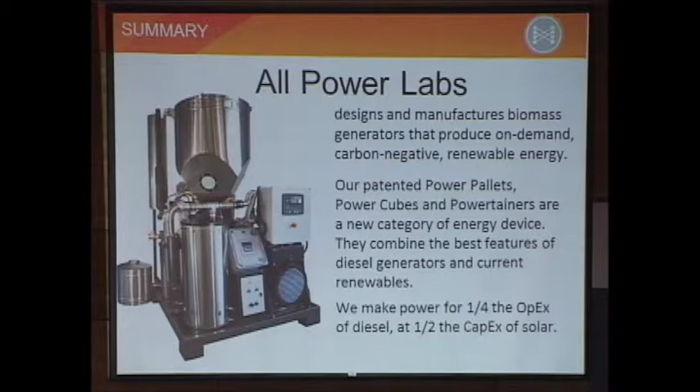The situation we're delivering these into is surprising to a lot of people. Energy access globally is still a major problem.

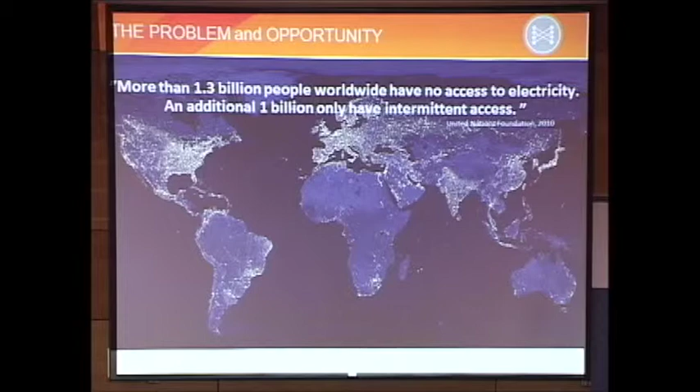Sorry. I was changing on the computer here, not this one.

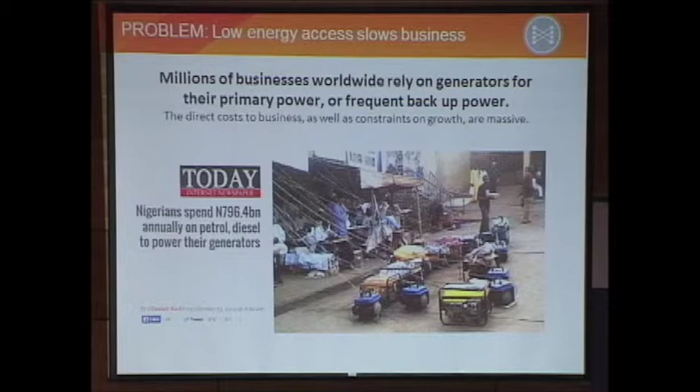Okay. So many different efforts are working in this space, from small-scale cook stoves up through full grid interconnection.

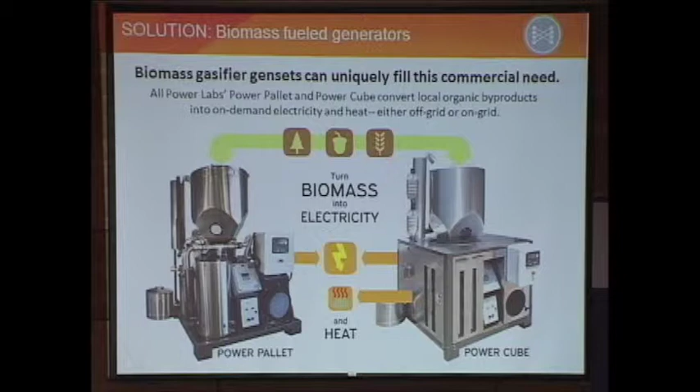And in doing so, you can create a unique combination of what we find as attractive features of artificial solar energy collection through PV panels and the traditional diesel genset.

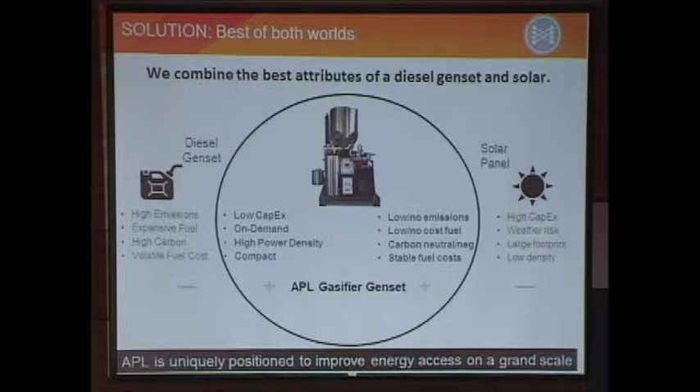So our deployment strategy is to take the machines to where the actual fuel is, to downsize and package the machines to a point where they can go to right where the byproduct organic matter is found.

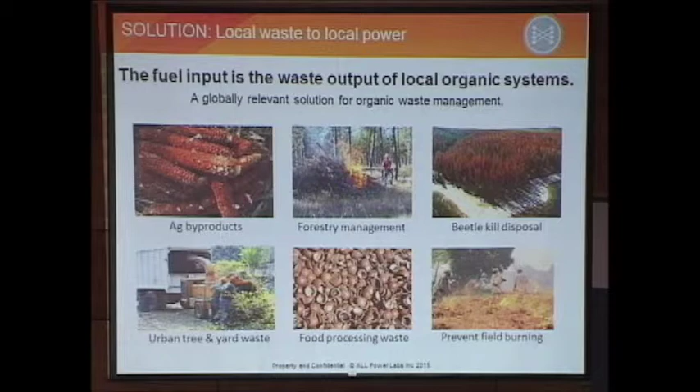When you're looking to make a significant impact on energy access globally, it's interesting if you overlay the maps of where there's an energy access problem and where there's a large amount of biomass.

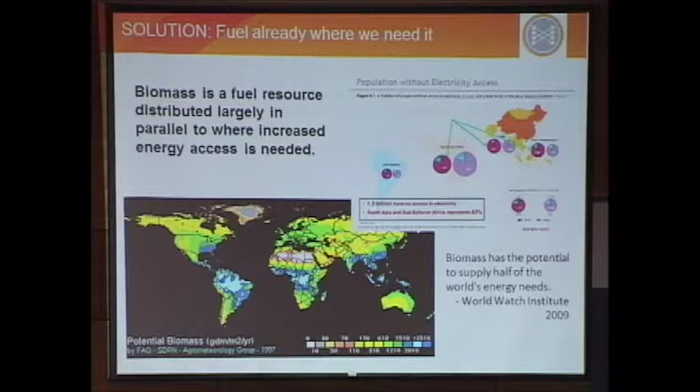So there's certainly many opportunities for growing, processing, purpose-making biomass. But at the outset, we're focused on what is already byproduct and waste that is typically a problem in its local area, and there is an energy need that it can be applied towards.

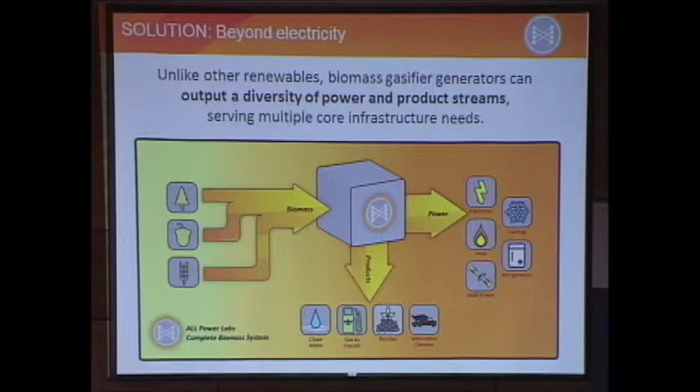One of the most exciting byproducts that you get when you're working with biomass is the potential for biochar.

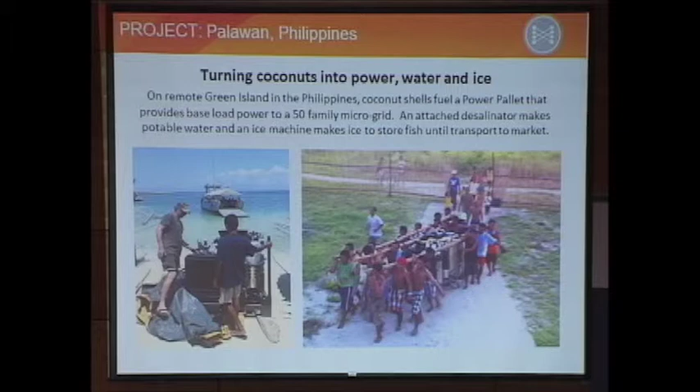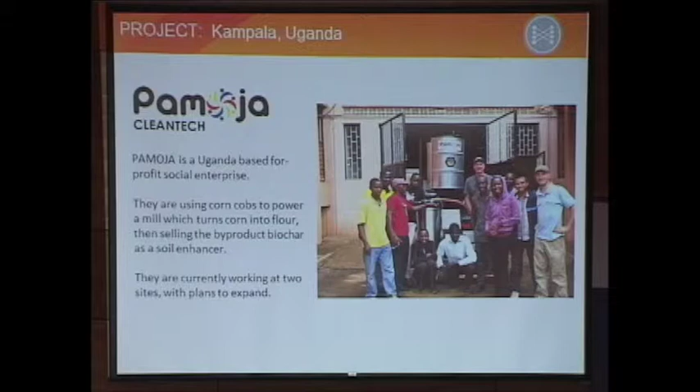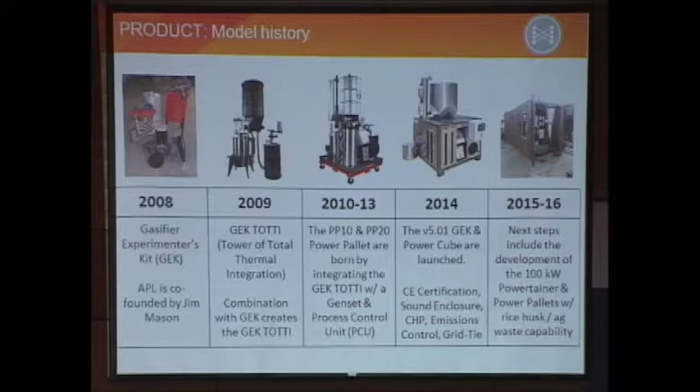The 2 main forms that we deliver the product in right now is the power pallet, which is focused on off-grid use in the developing world, and then an enclosed version of it called the power cube that is intended for grid tie, continuous operation, typically in the developed world.

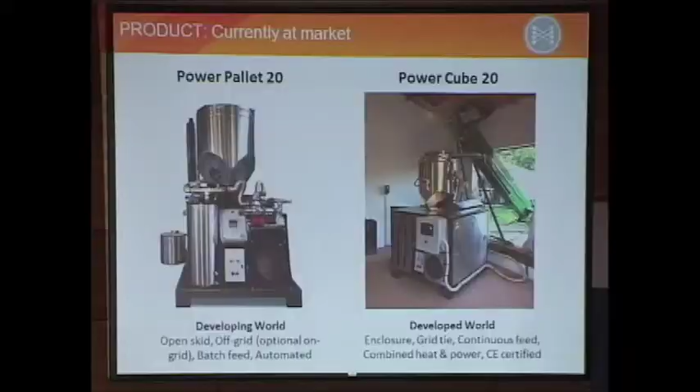The next product platform we have is called the Powertainer, which is a similarly fully integrated power generation system, but in this case built into a 20-foot shipping container.

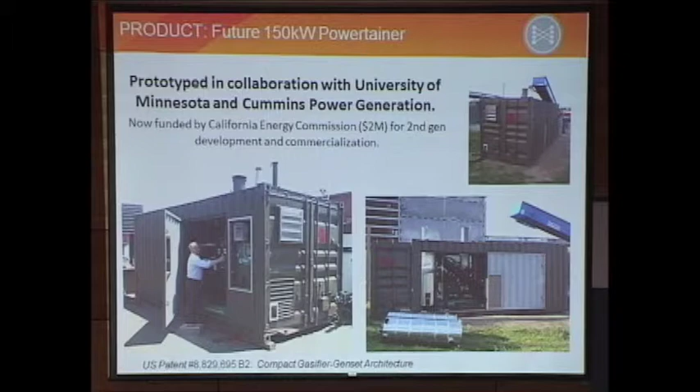Now, some common features in our systems across the different platforms. First is automation.

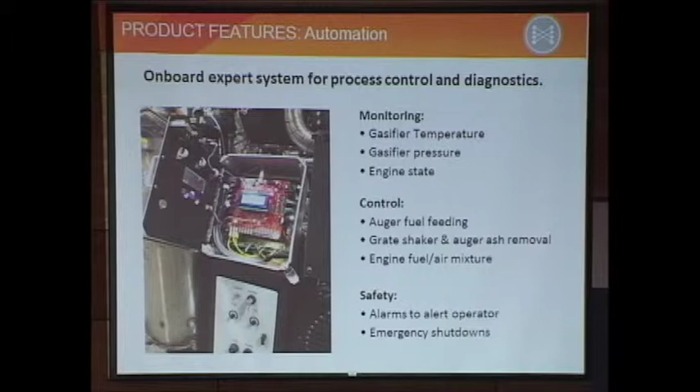We also offer grid tie equipment on our power pallets. This enables either paralleling multiple units together to get to higher power amounts, or tying to a national grid or a local microgrid as needed.

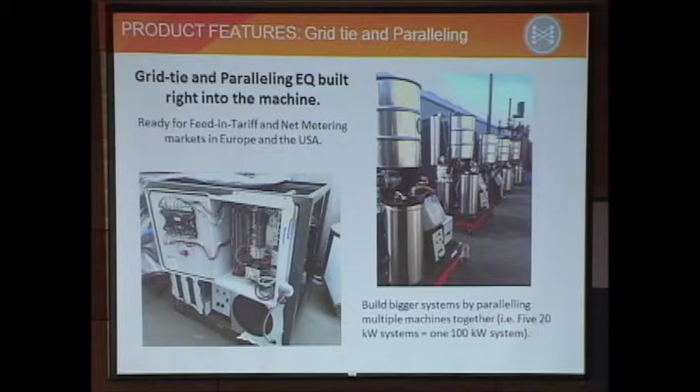We also have a combined heat and power add-on that mines the waste heat from the engine to provide hot water to off-board heating needs.

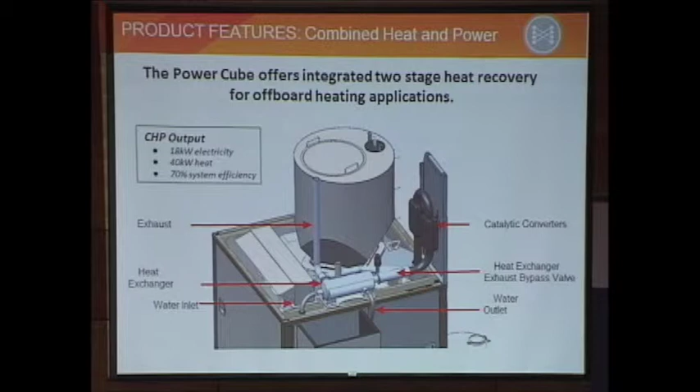So first of all, this goes half the speed it usually goes because we're translating it. How much? I have probably about 10 more minutes. Should I finish that, or do you want to go to question? It's okay? Okay. How many people here understand the English anyways? Okay, that's about what I thought. About half. You wouldn't understand the Spanish if I spoke my Spanish.

Okay, a couple distinguishing things that we've tried to do here. As we know, gasification has a long history. Most of it is dubious and, what do we say, challenged. So what we've tried to do here is a new take on gasification that is trying to package it into small products, get rid of the expectation that it's going to be a sprawling plant-type installation, get rid of the... Oh, sorry.

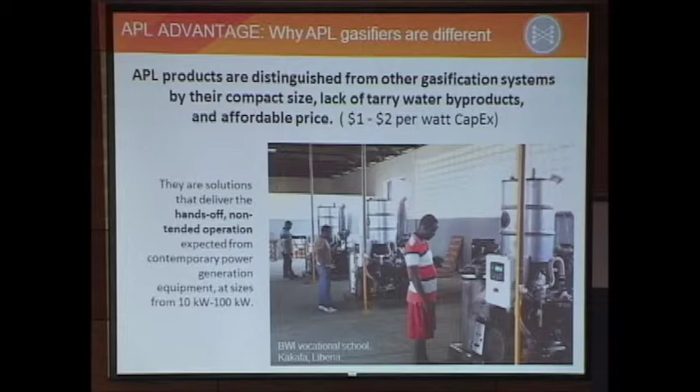We focused on solving the tar problem in the reactor, not in a downstream filtration system that really just moves the problem to the disposal of whatever your filtration media is.

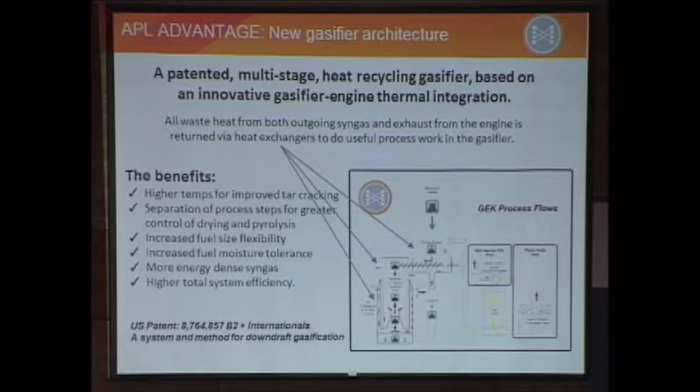So we've been developing this product for about 7 years, and our current stage is we are trying to establish centers internationally where we can really prove the commercial power viability and long runtime reliability of the units.

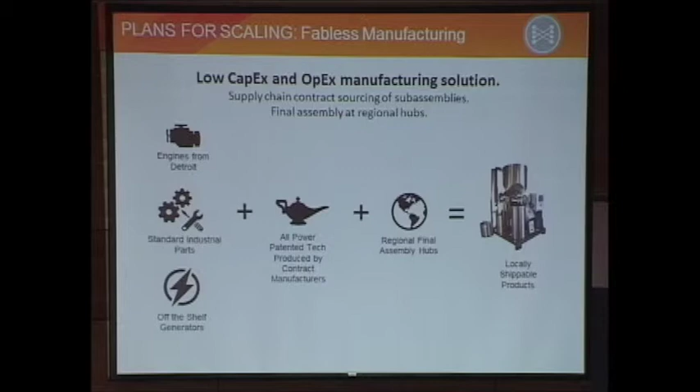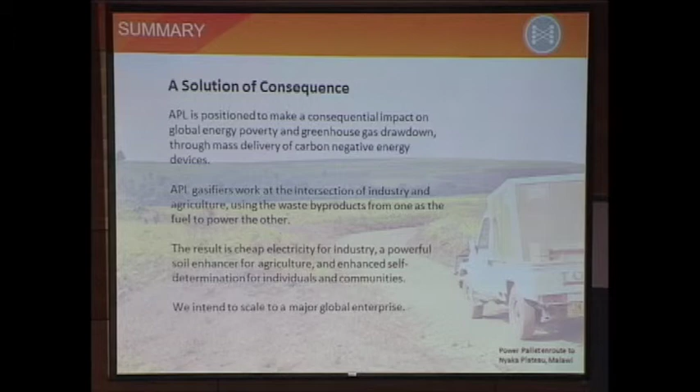Well, first of all, many thanks for crossing the world to come down here. And the question is mainly on the social aspect of the work you're doing, and is how a small community got empowerment from the technology you have been giving to them, because it's a technology that requires some level of expertise to be operated. So how the community reacted to that, and how it has been working so far.

Well, there is still a significant user challenge to operate this. This is not push button or turnkey simple yet.